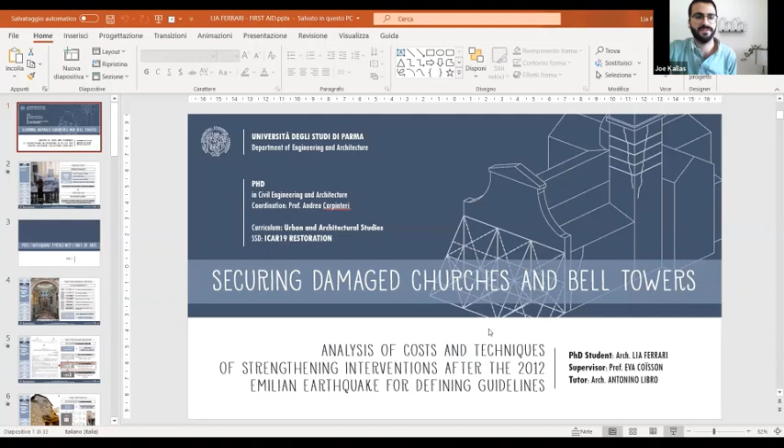I would like here to present the research I've carried out during the PhD program at the University of Parma. This research focused on the emergency management of cultural heritage affected by seismic events.

Securing the heavily damaged structures is one of the most critical tasks after a seismic event. These interventions are characterized by the utmost urgency in order to avoid the progress of damage, to protect the safety of people, and to quickly resume normal daily practices. Moreover, when dealing with historic constructions, the first aid issue becomes even more delicate and complex because of the need of preserving the cultural value of the building.

The solutions that have been adopted in the past in Italy demonstrated to be extremely uneven, often uneconomical, and sometimes even ineffective, or sometimes harmful for the buildings themselves. Moreover, during the final recovery, these devices are usually removed and substituted with other technologies, resulting in a great waste of time, material, and money. So the aim of the research is to optimize the strategy for securing damaged buildings, seeking a method for economic and technical assessment of emergency actions.

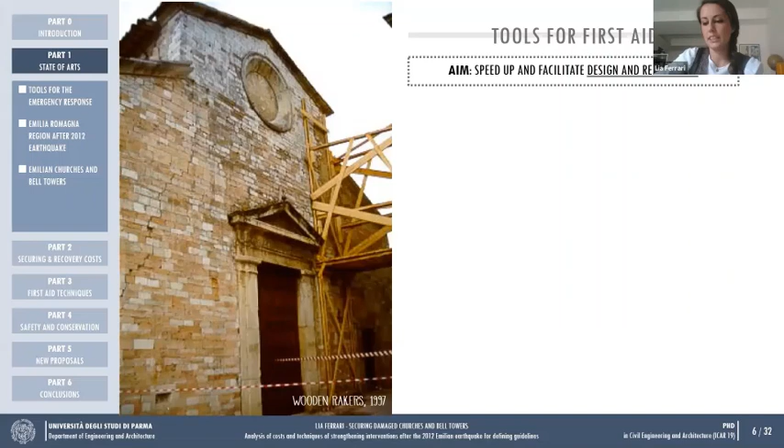In recent decades, new tools for first aid have also been developed, mainly aimed at its realization and design. Actually, this task has been underestimated in the past, thus the devices used until the end of the 20th century showed lots of technical and methodological problems. But recently, thanks to specific scientific studies, the concept of standardization and reuse of these devices has been introduced in this field.

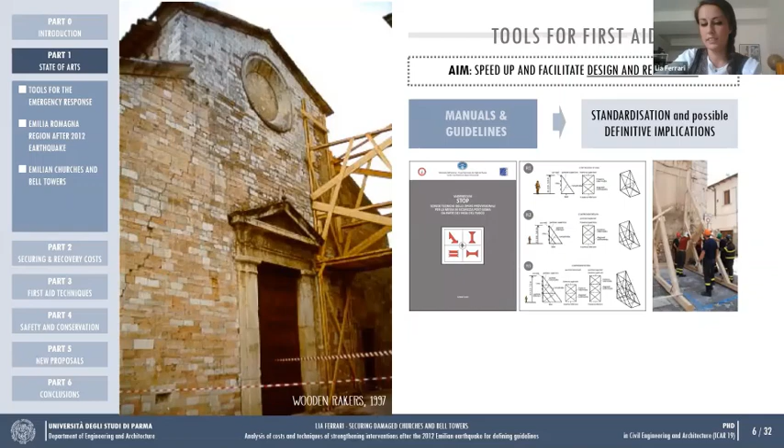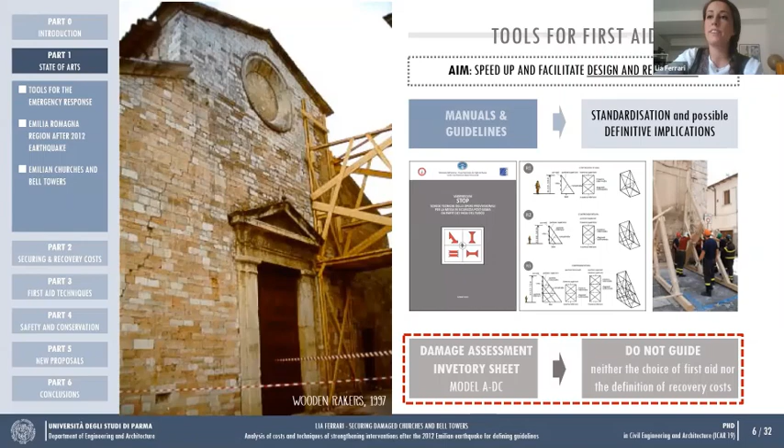Nevertheless, this potential is still often forgotten in on-site actions, and the decision-making process is not yet completely outlined. Then the research focused on the earthquake that struck the Emilia-Romagna region on the 20th and 29th of May 2012, analyzing the emergency management system activated. The Emilia response showed several aspects of particular innovation, especially for the issue of unified management.

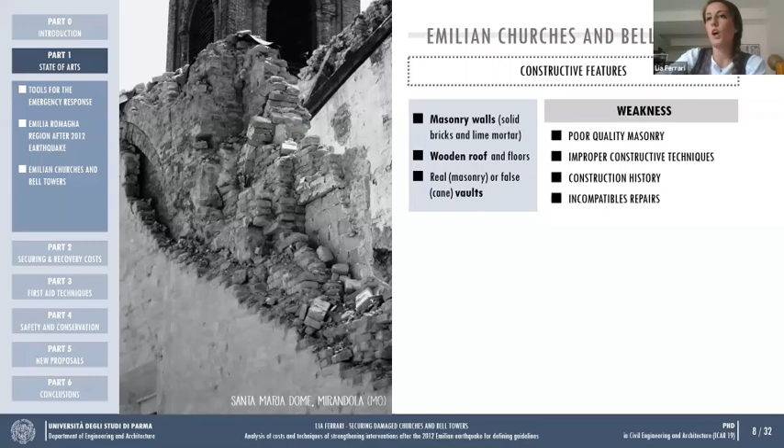Finally, the most affected architectural typologies, meaning churches and bell towers, were investigated. The seriousness of damage caused by the 2012 earthquake is a consequence of different factors, like poor quality masonry, improper constructive techniques, incompatible repairs, and the history itself. Moreover, these structures are particularly weak towards seismic action because of their architectural shape. Even more dangerous are the hammering phenomena between adjacent structures.

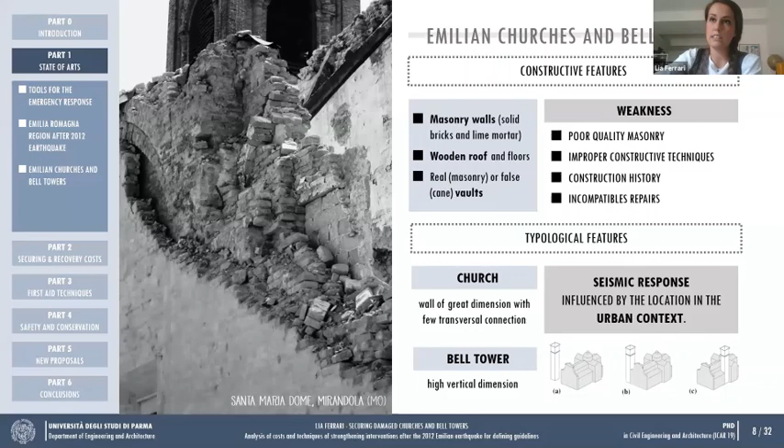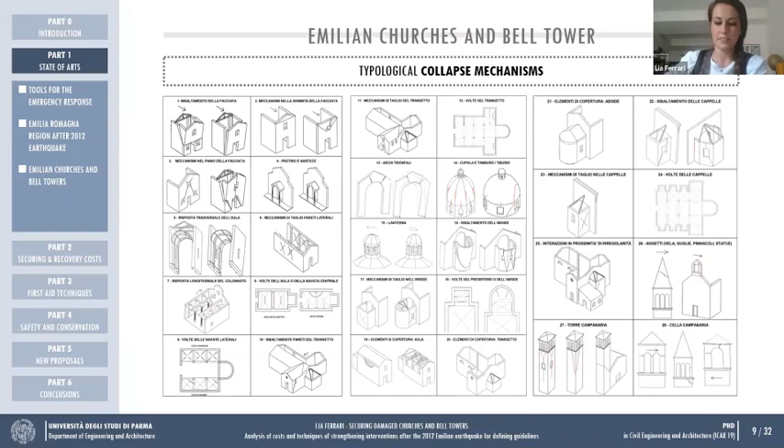The study of constructive and typological characteristics of these historic constructions has highlighted both the presence of intrinsic vulnerabilities and the sharing of the same collapse mechanisms, well represented in the A-DC model for churches damage assessment. Then the research goes on trying to deal with the problems highlighted in the preliminary analysis, starting from those related to the economic assessment of damages.

The high frequency with which destructive seismic events affect the national territory generates significant extraordinary costs. Just think that in the last 50 years, 7 destructive earthquakes damaged Italian buildings for more than 120 billion euros. Moreover, in 2012, the recovery of the numerous damaged churches proved to be one of the most expensive interventions.

What is important here is to highlight that the financing program of first aid and recovery intervention is based on the damage assessment carried out during the emergency phase, as we've seen before. So the economic evaluation of the effects caused by the seismic event is essential for requiring proper funding for reconstruction, but this assessment is as important as it is complex.

The A-DC model requires a fast evaluation of costs, but the lack of a guided path produces non-homogeneous and non-immediate values. Therefore, we have analyzed the cost of the 2012 earthquake with the aim of defining a methodology for simply and quickly identifying a range of first aid and recovery costs.

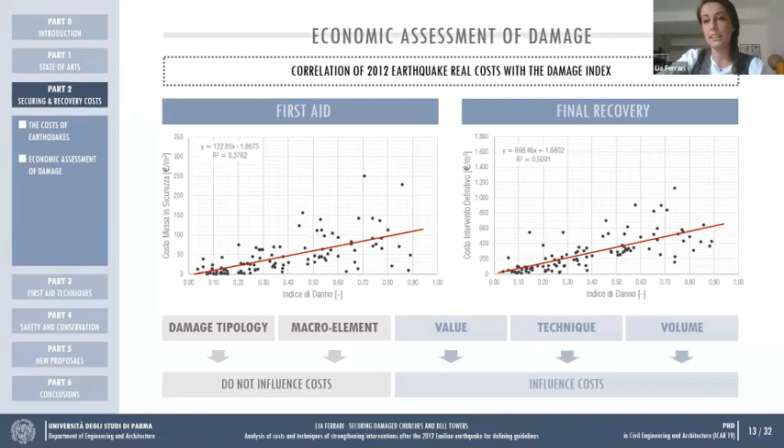We try to find some factors that could affect this expense. This analysis highlighted that neither the type of damage nor the type of macro element clearly influenced the cost, whereas the architectural value, the technique used for first aid, and the volume of the building influenced the overall amount.

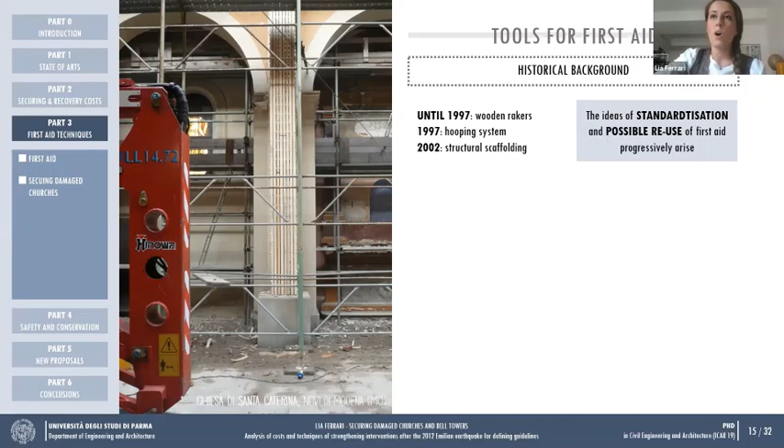After that, the research focused on the analysis of first aid technique, starting from the study of the historical evolution. In the past, wooden rakers were the mainly used first aid interventions. Then the progressive improvement of techniques introduced hoops and structural scaffoldings, up to the present days in which the use of new materials, new systems, and new equipment offers many alternatives, summarized in this table.

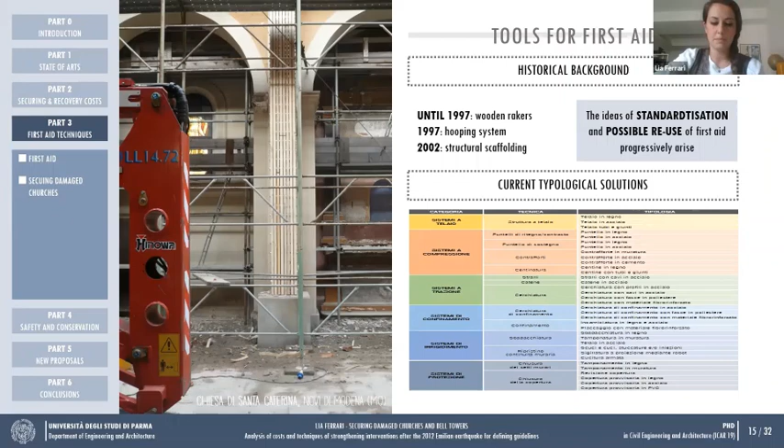So how do we find the optimal solution for the specific case among all these possibilities? As usually happens in the restoration field, this choice should come from the analysis of the damages occurred after the earthquake. However, the current ADC model is very generic in this part, proposing only a list of possible first aid actions and a blank space for freely describing the suggested interventions.

Therefore, we have analyzed some interventions carried out after the 2012 earthquake with the aim of defining a methodology for guiding the choice of the most effective securing action.

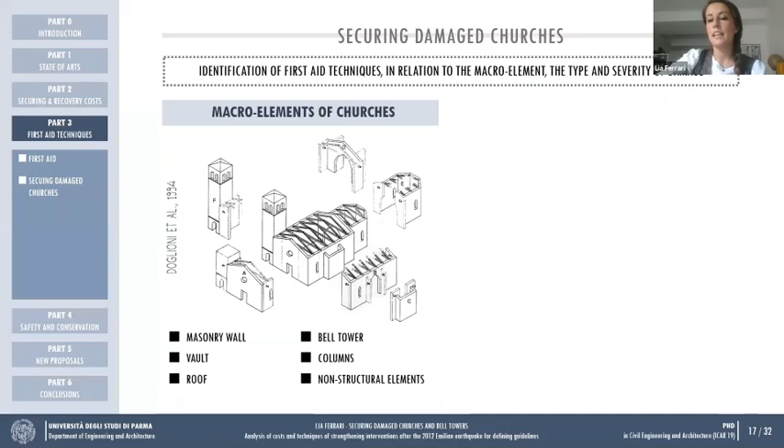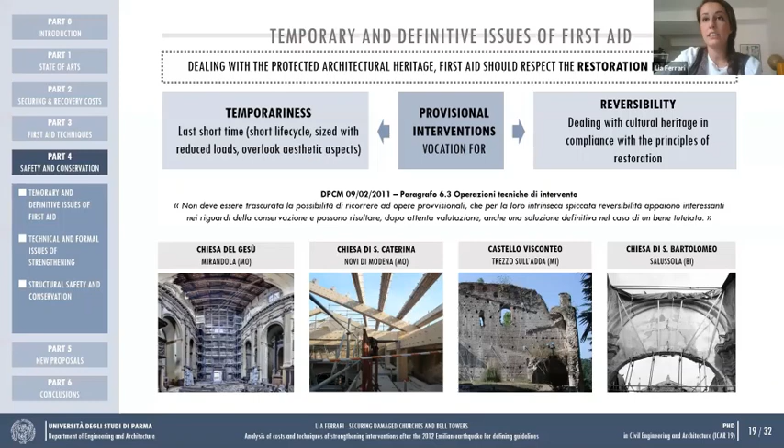But this kind of approach requires visible strengthening devices, and this is difficult to be accepted.

However, the integration between structural, functional, and formal aspects could allow us to strengthen the cultural heritage in an effective and respectful way. Here again, there are some examples that seek a balance between safety and conservation issues.

So all these examples underline the importance of a critical, aware, and open project. The final solution arises from a complex path, searching for the right balance between all involved aspects. Once again, an interdisciplinary approach is fundamental to overcome all these difficulties.

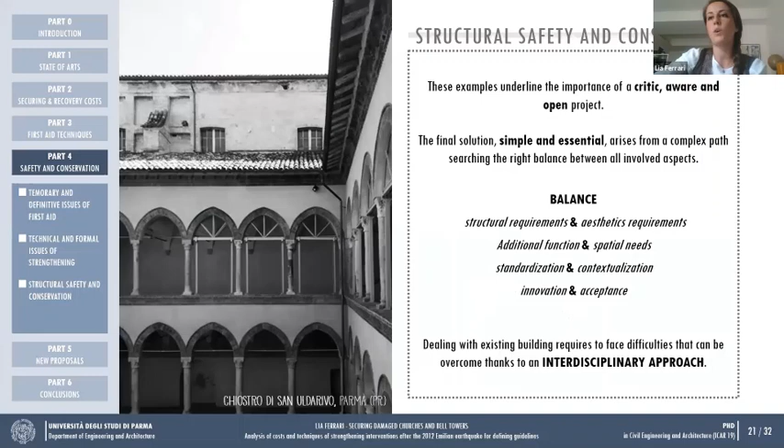After all these considerations, some proposals have been outlined to help and guide the first aid responder during the economic assessment of damages and during the choice of the emergency action. So let's start from the economic assessment.

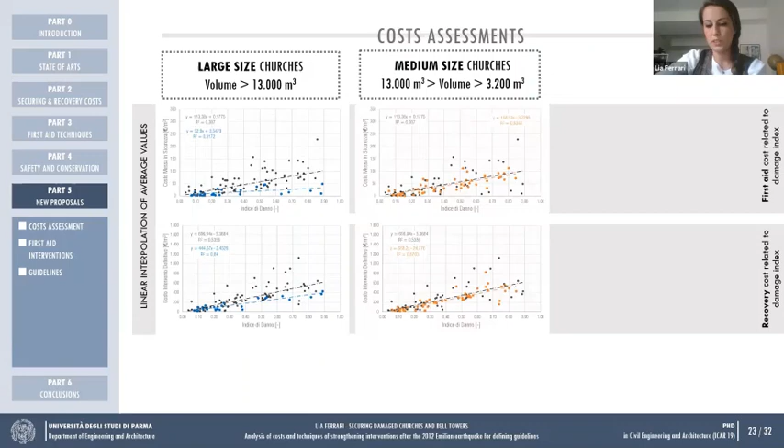The analysis also showed a correlation with the church's size. For large volume structures, the cost per unit of volume tends to be lower than the average values. Whereas for medium volume churches, costs are similar to the average ones, and for small constructions, costs are higher than the average values.

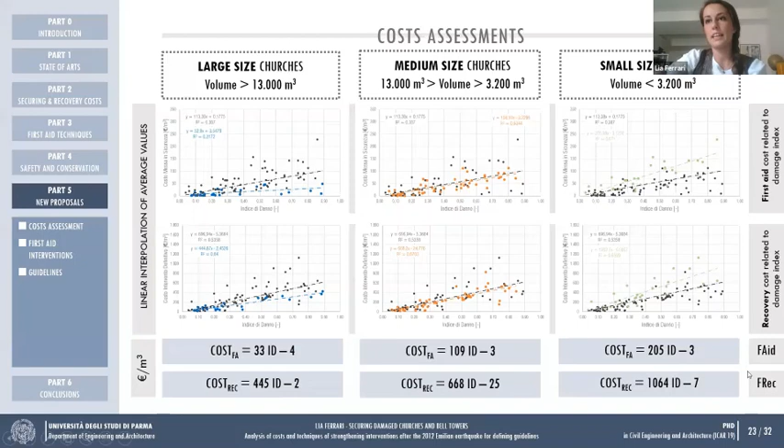Therefore, three different expressions of cost have been defined according to the volume size, for both first aid intervention and the final recovery. These formulations can be used by administrations for a preliminary cost assessment in order to obtain homogeneous and more accurate economic evaluations, at least for Emilian churches.

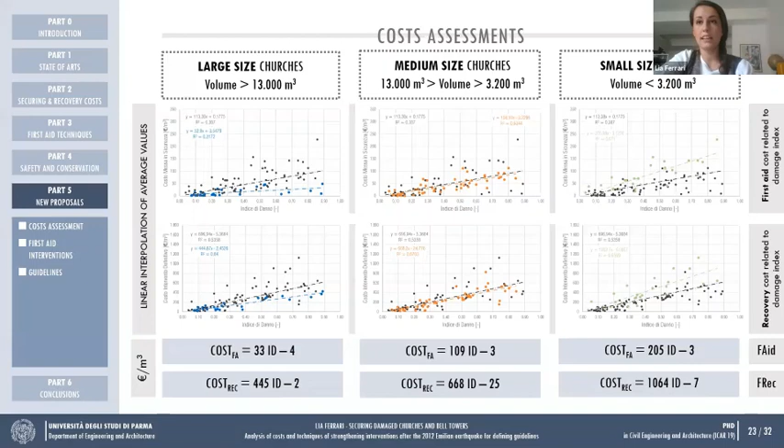The first aid intervention has to be effective, and effective under different points of view: operational, structural, conservative, and economic. If the first aid satisfies all these requirements, it would acquire the maximum of efficiency. But actually, only some of these needs could be satisfied by a specific technique.

Therefore, we propose an effectiveness assessment inventory sheet for each first aid technique. This document is composed of 4 sections and lists all the possible features that optimize the efficiency of the intervention. All these features have been evaluated for the specific technique with a score equal to 0 if negative, 0.5 if average, and 1 if positive.

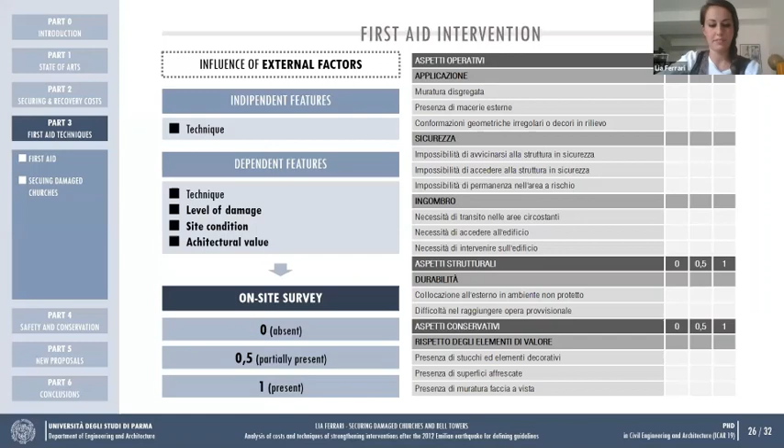Okay, and now with all the data collected, it is possible to choose the emergency solution for the affected macro element. First of all, we have to identify all the available techniques with the tables drafted in part 3 through the analysis of techniques. And then we can define the effectiveness of each possible technique, evaluating them with a score that is made of 2 contributions, P1 and P2.

P1 is the sum of all the independent feature values, and so it is a constant value. Whereas, on the other hand, P2 is the sum of the dependent feature values, each one multiplied by the score attributed to the corresponding external factor.

In this way, each dependent feature is weighted according to the specific case. Therefore, also the final score that represents the efficiency index of the technique is weighted and related to the specific case.

Moreover, a technique should be excluded if incompatible. That means that an external factor is present whose corresponding dependent feature has a negative judgment.

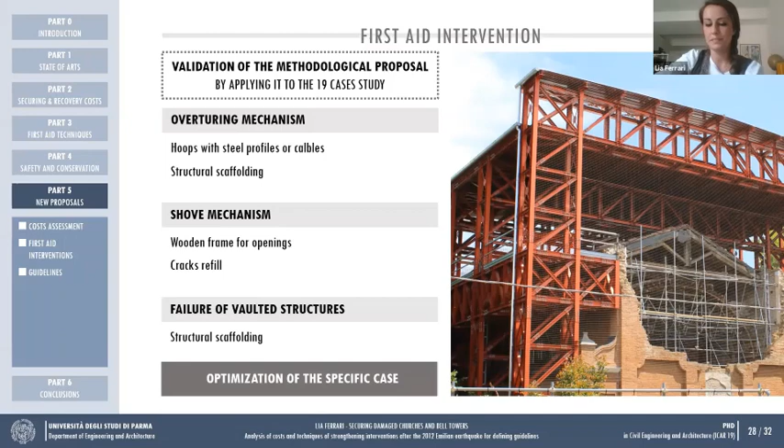Okay, and once the first aid intervention has been identified, it is important to follow some methodological and operational measures that allow further optimization if applied from the beginning. Therefore, for each first aid technique, a specific document has been drafted, highlighting the main aspects to care for during the design and realization phase.

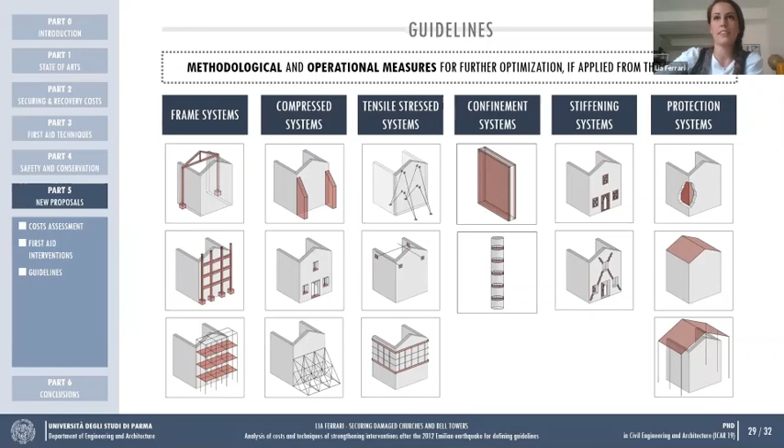And now let's move to conclusions. The research focused on the emergency management for securing cultural heritage with specific emphasis on first aid interventions on masonry churches and bell towers affected by the 2012 earthquake.

By means of an economic analysis of damages, the study defined a method for estimating direct costs of securing and repairing damaged structures as a function of their damage index and their volume. Moreover, through the analysis of current first aid techniques, a speedy procedure has been defined in order to assist the choice of emergency intervention, evaluating its efficiency.

And finally, some reflections concerned the possibility of using provisional interventions in a definitive way. Therefore, guidelines have been outlined, identifying technical and operational measures for the protection of cultural value in damaged structures.

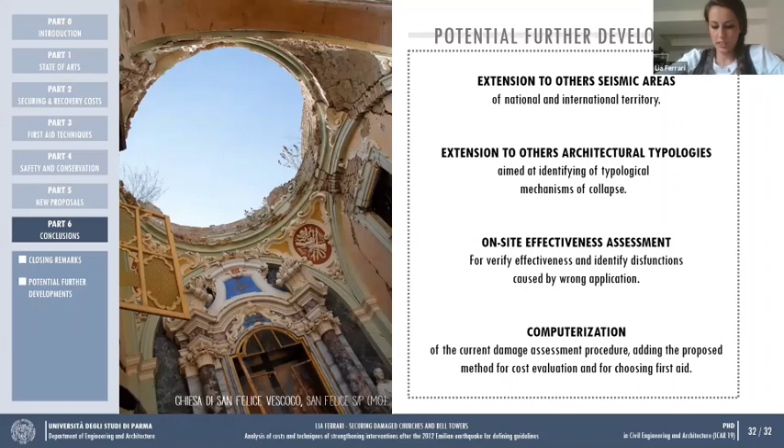And the study can be extended by considering other architectural typologies and other national or international areas. Moreover, the accuracy of the efficiency analysis could be improved by on-site investigations. And finally, the development of a computerized software for damage, economic, and first aid assessment could be very useful to speed up and homogenize the procedure, as well as data exchange and storage.

And that's all. Thank you for your kind attention.